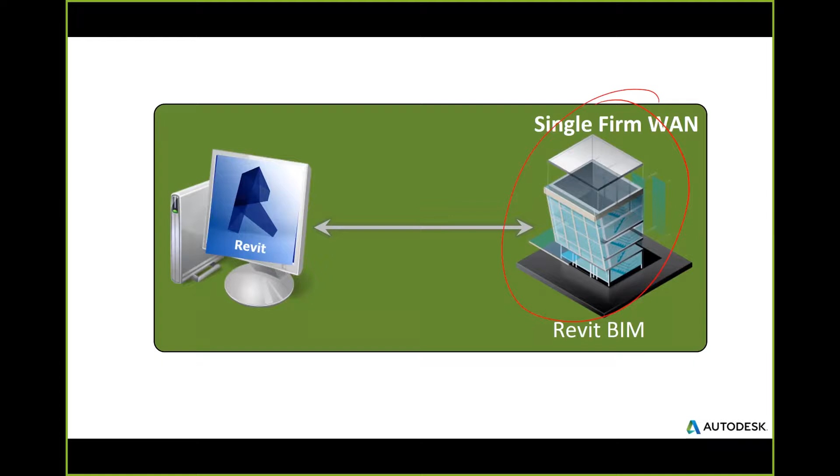Architects and engineers have known this for a long time, but the construction, medium-sized contractors, sub-trades, they're not familiar with this. They're familiar with AutoCAD being single-based; you can only open up and work on one file at a time. Well, with Revit, you can work on one file across multiple people at the same time.

So those firms that have been doing this for a while, the architects and engineers, for the most part, are the ones who buy Collaboration for Revit, or a general contractor who is part of a design-build group, and the general contractor is the head of that group. Collaboration for Revit would be for that entire team. And essentially, in a nutshell, it is the Revit central file living in the cloud.

It's as simple as that. All of your best practices on how you work with central files still take precedence. So let's dig into it.

So before Collaboration for Revit showed its head in this arena, we used to have firms saying, how can we use some technology to have a central file across multiple geographic locations and offices? So this is what used to be done in the past. Make no mistake, if you needed to do this yesterday before investing in Collaboration for Revit, you would be spending money and people time and hardware and a giant leap of faith for the project manager, because all of this had to be working simultaneously to have what I call multi-firm concurrent authoring.

The key point of this one here was the VPN connection. So you can put that by the wayside, and essentially with the investment in Collaboration for Revit, you've already got Revit, so you just basically tack on that service, and the service is per user who needs to run Collaboration for Revit. I'm all about keeping it simple, and I like using lay terms, and I try to stay out of the weeds with the geek terminology.

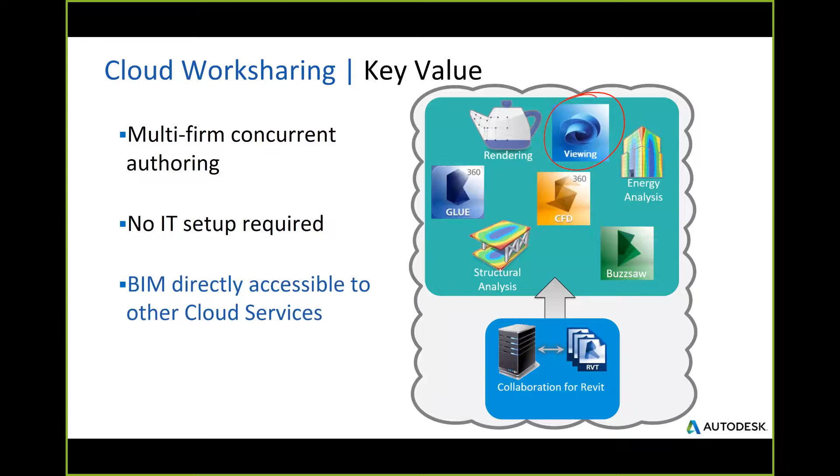And part of what we're going to preview is how do you leverage the cloud now? This is all about viewing, commenting, and marking up. And stay tuned, because I'm going to show my smartphone and show the team leveraged through my smartphone for commenting and marking up. Overall, we can do a lot from the phone and of course from your desktop as well.

So if I put my little geek hat on for a second here, there's me with my little triangular hat. You should know that we're not going to kill your bandwidth overall. Any delta changes, we add a door, we add a window, that delta change to the model is basically cached. And when you click on Save to Central, it's just that delta change that gets pushed up to the cloud. And then vice versa.

So let's say I've got Douglas, who's my structural engineer down here, and Douglas says, hey, Caesar, I changed the structural plan. I added this new wide flange column. Whenever I say Reload Latest, I basically receive Douglas's column update. So for you geek folks out there, we have a built-in software accelerator.

You should always know that you're working on the locally cached file. Those of you that have used central files before know that as a team, you're never working on the actual central file. You're always working on a local file. Same thing here. So in terms of what you do today with Revit Server, this is actually more transparent.

You don't know it, but it will locally cache the file for you and make you work on that file. So you don't have to take the exercise of downloading a copy of the central file, making it local and all that stuff. It's done for you.

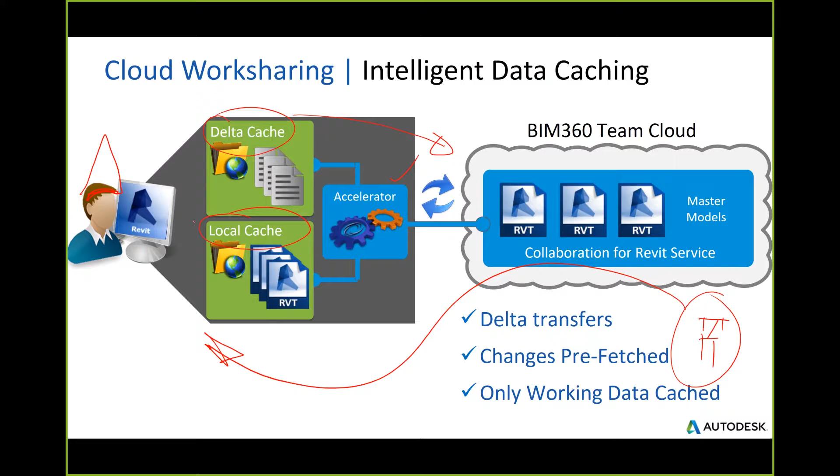And Communicator, one of the main values it holds is that it does chatting very, very well. So Communicator is a tool that pops out when you're running Revit. Those people that are currently signed into Revit and using it right now would show up as part of the communication on this team. The project that we're working on here is the small medical center. So I'm going to see when people sign in the morning in Revit, I'm going to see them show up there.

And then I can do either a direct chat with this person next to me by saying, hey, just reloaded the architectural and structural models. But we could actually do a team chat. So when more people show up and you want to send a general message to the entire team, this team chat can be used through Communicator as well. And nice little features from the tools down here to allow for screen capture.

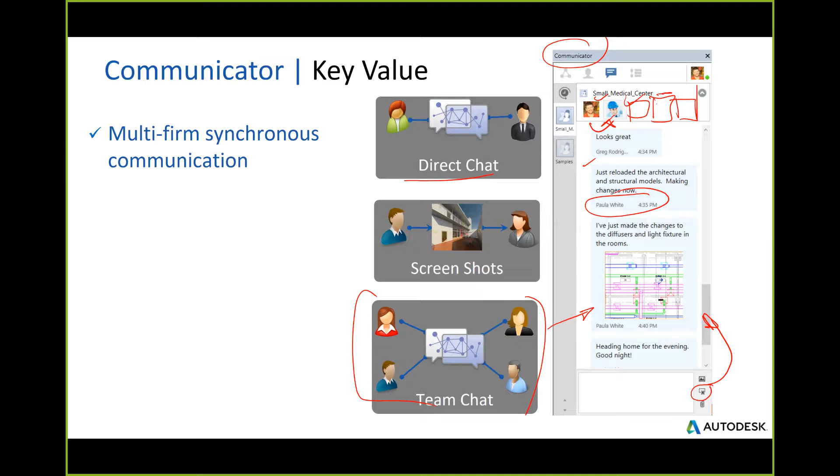Moral of the story, you would use this to try to cut back on email about incidental little things about the project. Are we using a butt jamb in here? Or are we using a miter jamb here? Really generalized questions that kind of bottleneck email. You can do this all through Communicator, and then everything is basically logged historically. And the last part about this is that you can export all of this communication. Safe to say that you're going to export this to a text file.

Now let me clean up my screen a little bit here because I just made a giant mess of it.

And whenever different people save to Central, and they're saving different Revit files, all of this will be communicated through this tool. So we get all kinds of great oversight on the latest and greatest, and then we ourselves can actually take advantage of this for our own well-being. All right, flip the page.

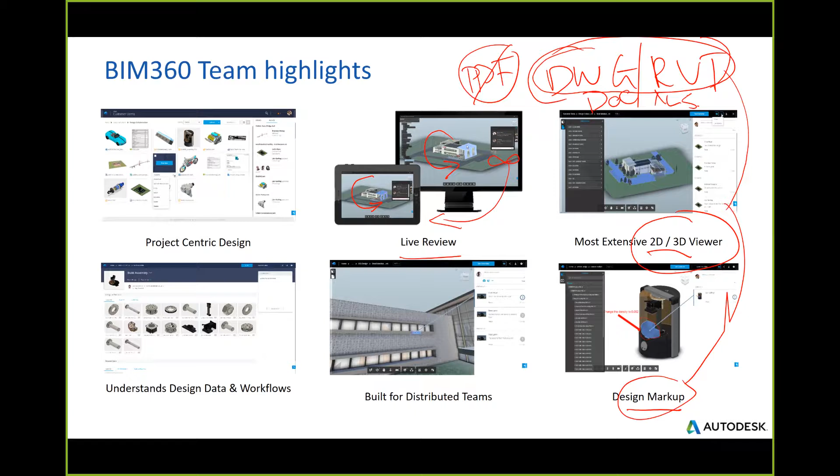So virtually any file format can be viewed through the native web browser or the app, and then on virtually any device. So yes, it's Android, iOS, and desktop. These mobile devices, whether they're Android or iOS, have the capabilities of going offline with your data files, which means you don't need an internet connection or a cell service to see them. The web version, of course, needs an internet connection, but the moral of the story is that the tool sets are practically the same in each instance and operate in the same manner.

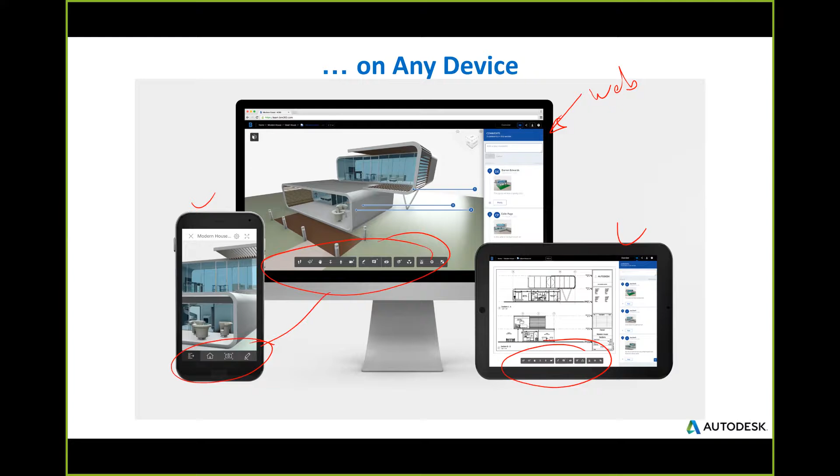So, collaboration for Revit, what's in the box? You get this central file work sharing in the cloud. When you buy collaboration for Revit, or we call it C4R as the acronym, included in C4R is BIM 360 Team. It's a per license basis. Communicator, that chat tool that's inside of Revit. The ability to do model management and versioning of the files, that's part of collaboration for Revit and BIM 360 Team.

The scalable licensing. So whether you buy a full license of C4R, or if you buy an individual license of Team, like I was saying for my project manager at $120, the scalable license means you can allocate the license to the person. The license follows the person on any device. If that person leaves the firm or moves on to another project, you can revoke that license and then administer it to somebody else. So it's a nice, flexible way of licensing. If you guys are familiar with Autodesk licensing from the past, it used to follow the machine, so it's different.

And essentially, the investment here is an $800 investment, but literally, if it just saves 10 minutes a week per person, it pays for itself over the duration of a year. We have a lot of large, medium-sized, and small projects on C4R overall. And the main parts of these projects are all about accessing the project data. That's why projects are being mandated, or architects that are leading projects are asking their subs to follow suit. You know, we want to access the project data. So that's collaboration for Revit.

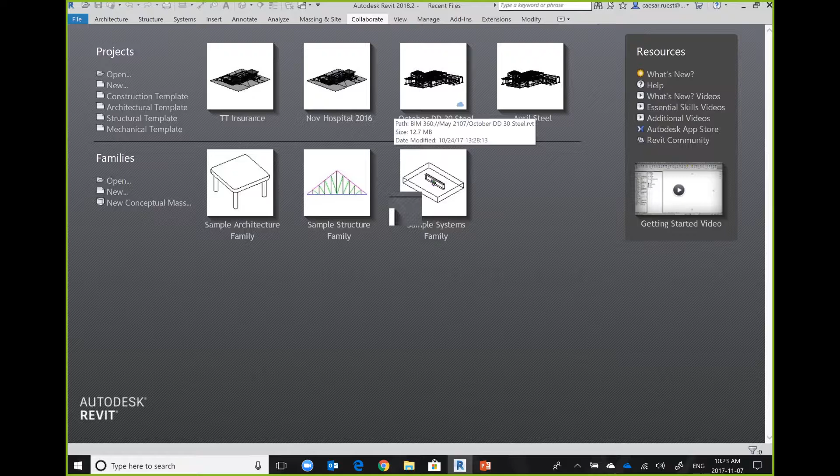It's as simple as that. So let's take a look now at what all of this fuss is about. Right in Revit, Revit 2018 does come with the Collaborate for Revit guts in it. The service is not activated. But when you see Revit, I'll just zoom into it here for us, the Collaborate tab will become your best friend. Now, right now, the Collaborate tab is showing me this ability to manage models.

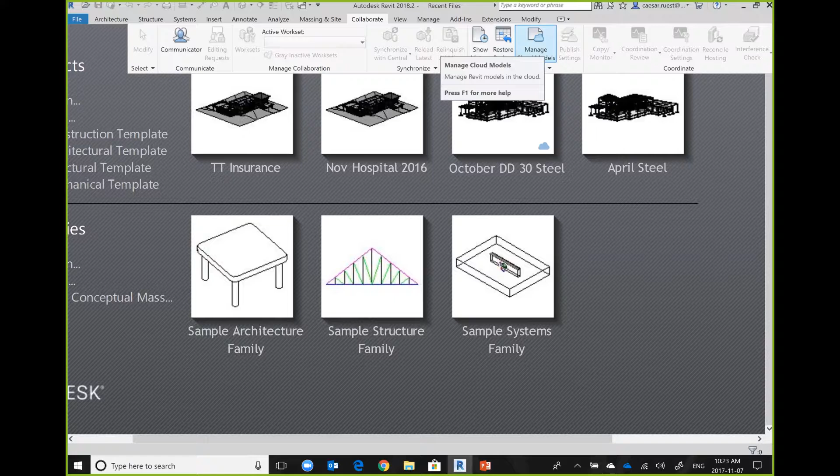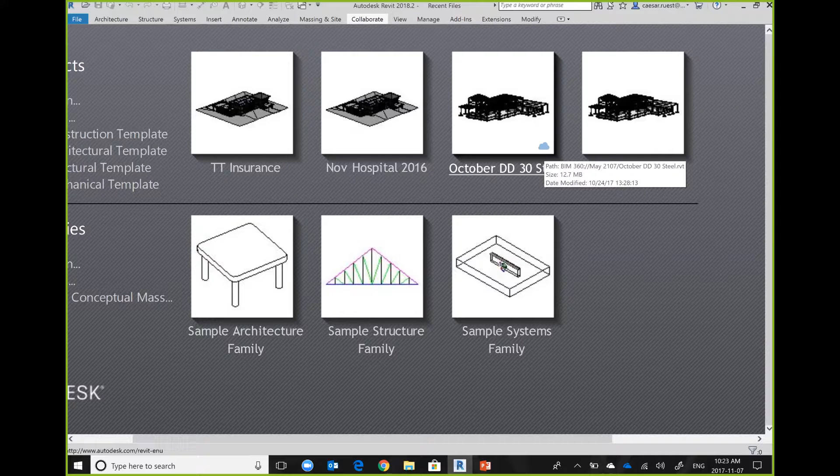This is without even a single model open right now, but you can see this model with this moniker has a path of BIM 360. The project name is May 2107. And in this case here, this is living in the cloud. This is not. And the same thing over here, when you say open, you're going to see BIM 360 up here now. And this is your gateway to the cloud, BIM 360 Team, where your files will live.

Essentially, let's open up this. Let's start from scratch. This file called TT Insurance is local to my server or local to my hard drive. I want to show you how easy it is to kick that thing up to the cloud. This is about a 25 megabyte file. It's got 3D views on the go. It's got sheets already on the go. Collaborate in the cloud.

Now, there was very, very little pre-work set up here. The only thing that was set up that I recommend before you click on the Collaborate in Cloud button is that you have to set up the project on BIM 360 Team first. So once you set up the project, you'll have that project name listed here. So for example, let's plug it into this 2107.

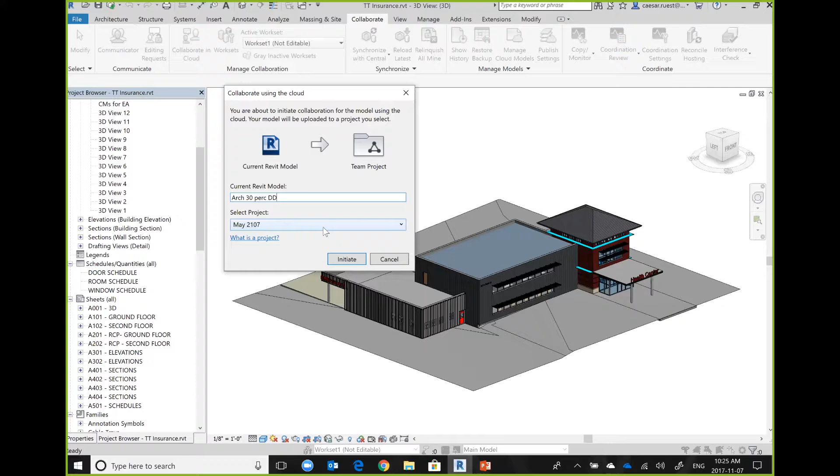And we can say, let's rename this file. Now that it's moving off my local desktop, we can say that this is my Arch, let's say 30% DD, right? So we're giving it a practical name, and then we say initiate. Now, if it's not a central file, it'll turn it into a central file. If it is a central file, it'll just push it up to the cloud automatically without changing the worksets. But it's doing these steps first.

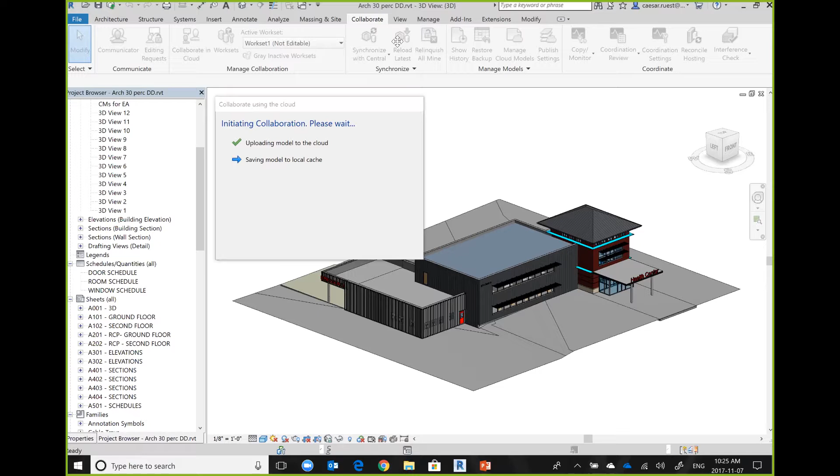This is pushing the full 25 megabytes up to the cloud. And then once it's up in the cloud, let me just see if I can move this, you're going to see my name at the top there where it says Arch 30% DD now. It says, okay, I just pushed it up to the cloud. I'm going to pull back a locally cached file to you, Caesar, and then you can start working on it. So right now, that file name at the top where it says Arch 30%, I am truly working on my locally cached file, and I can just close this off.

So here we are in the cloud. It does a default publish at first so that some project managers can start to see some of the default sheets and 3D views in the cloud. But as architects and engineers, the traditional workflow, when they work together, they like to work on something for a week and not have architectural changes sporadically happen throughout the day, throughout the week. As engineers, we would say, give us a set to work on. We'll work on it, and then we'll come back towards the end of the week if we wanted to.

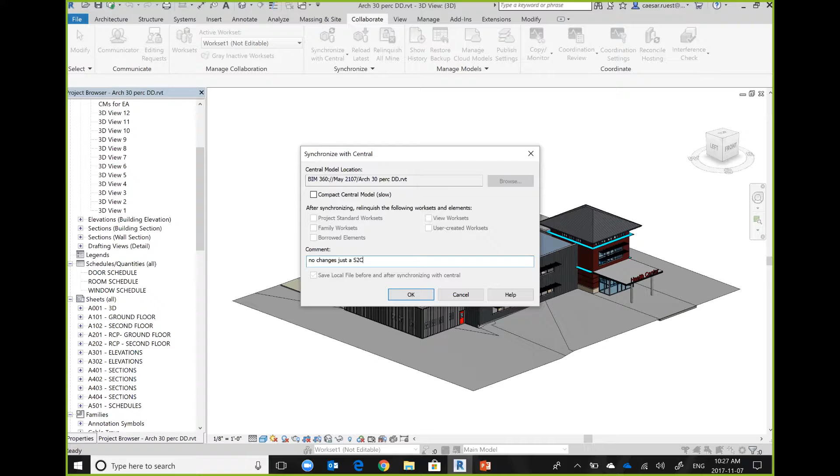So you have that choice of being dynamic, of working day to day, or hour to hour, and saving to central. That's fine. You just click on save locally if you're going to go get a coffee. You click on save to central if you're going to literally go for lunch or something like that. And you would put in some notes here to say, like, no changes, just a save to central. So if there were changes, those delta changes will be saved. But there's nothing much that's saved other than it's publishing out these sheets.

And so that's a little bit of a segue. In the theme of Star Wars, we have the power, or whatever the case is, if we want to lock down what our wonderful project managers need to see, because as the Revit users, we might have a bunch of sheets on the go and a bunch of 3D views and sections on the go, but none of them are fully complete. When you only want to give people access to see parts of the model and sheets, you go to a publish setting.

And this feature has been in Revit for a long time. You create a new publish set. And then from this publish set, you go ahead and choose the actual sheets that you wish to have sent to BIM 360 Team site.

So in this case now, if I save and close this set, I will only send to BIM 360 Team, which means my project manager won't get to see all of these sheets here in Revit. They will only get to see these sheets and this one 3D view. So it's your call how you want to publish.

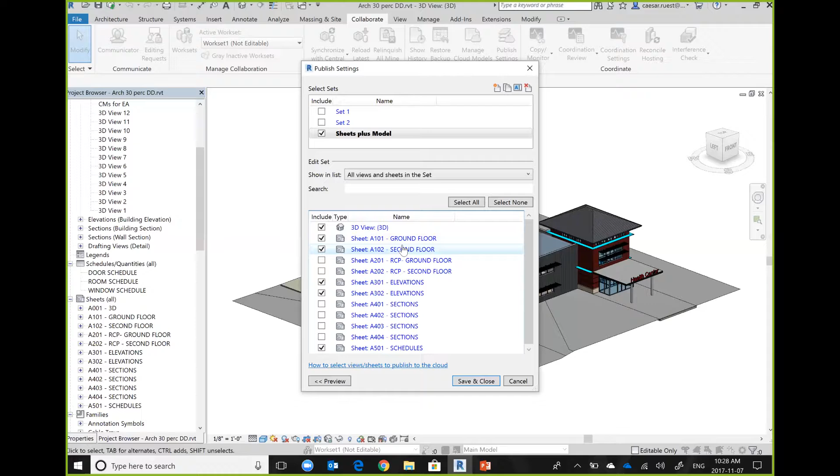So once you save and close it, the rule is you don't just save to central now. You use this next button, which is your Manage Cloud Models. And this is where the power of Superman or the power of God kind of comes in, where you say, in May 2107, I want to publish this file right here. You can see Arch 30% DD, and I'll zoom into it here.

You can see this one here has got this symbol, meaning, hey, you haven't published latest. You changed the publishing sets. If you want that latest published set to go to the cloud, you need to click this button. But this one says the latest published set here is already in the cloud.

So we would click this, and it would give us this educational information page, and you say, yep, got it. And now it's going to go ahead and publish this. And it says you can close this window during publishing. We'll get back to you.

While I'm in this dialog box, I want to show you something from an administrative standpoint. If your setting is Revit, it will still save 10 versions of the model every time you click on save and save to central. You can view those versions here. You would also delete the master central files here.

I had one customer say, hey, Caesar, I keep deleting the file that's in Team, and the bloody thing keeps showing up after we click on save to central, or after we click on publish. Like, what's going on? Well, the mystery behind it all is we actually have a central repository in the cloud for C4R, and then we have a mirrored image for publishing.

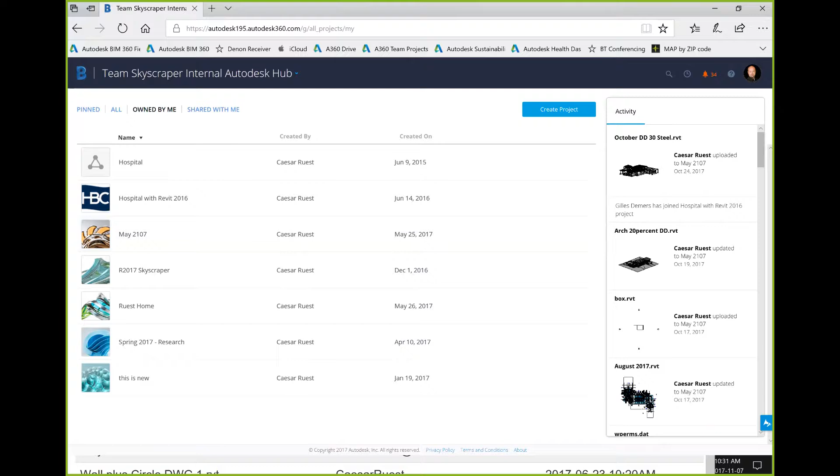Let me show you Team. So here we are in our hub, and this is part 3 of the discussion. This is where the published files land. My hub, this would be your company name up here. These would be the projects that you're hosting in your company. We have this one project called Hospital 2016.

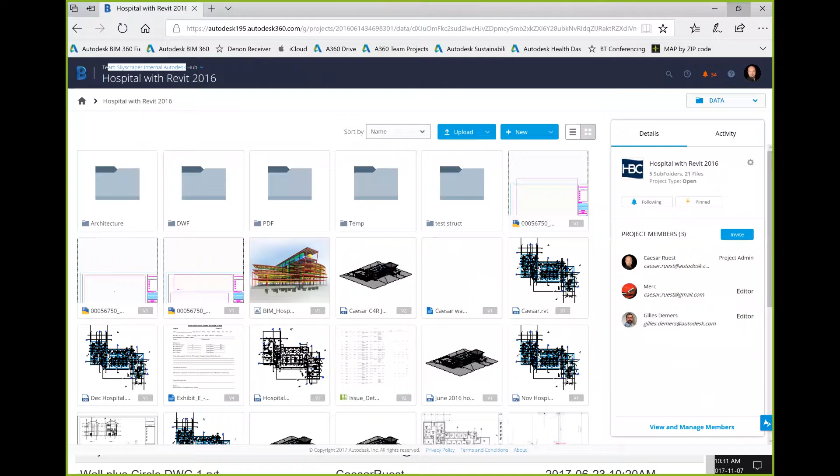And what you see is what you're going to get. So in this case here, this is a good chance for me to see if I can bring my cell phone back to light. Let me just coordinate this a little bit better. Okay, let me take this off here, and for some reason this is not cooperating so good, so bear with me.

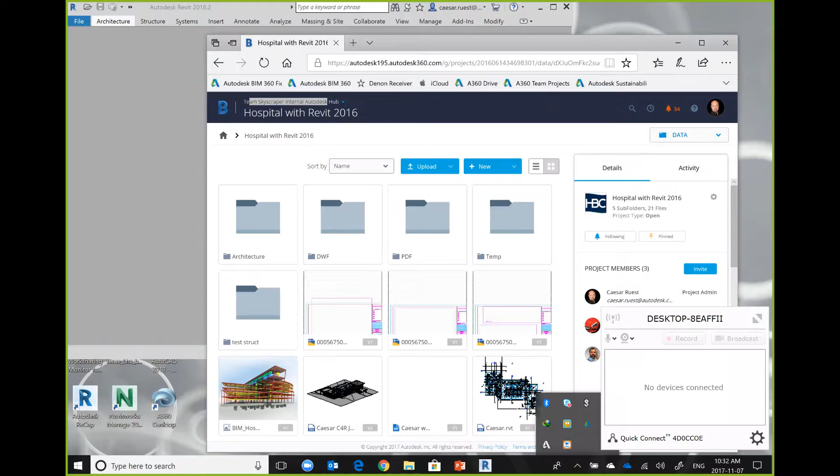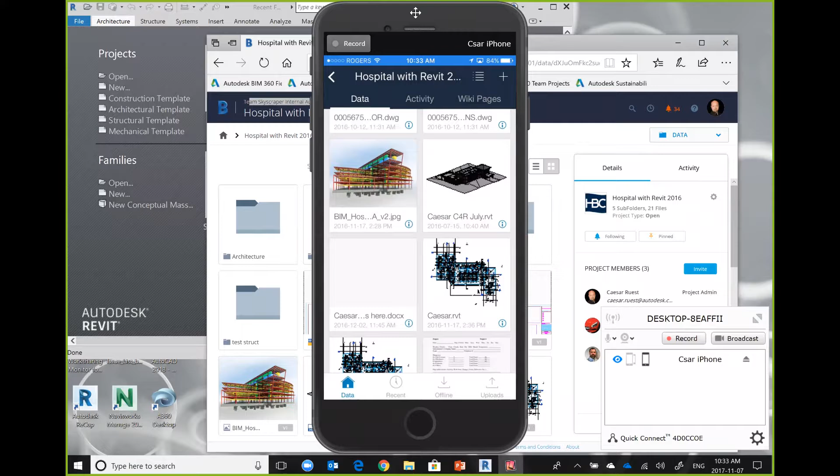So I've got my 2018, let me bring that back up because there's something else I wanted to show you in there. I've got my Team site, and I wanted to bring up my phone. So let me make sure that my Reflector is running. Okay, that's running. So let me see if I can connect my phone to it here now. There we go. Okay, so let's put these two puppies side by side.

So here we have it. So when you're using the web flavor, we're inside the project 2016. This is what you're seeing. So when I scroll this, you can see this is a JPEG. These are DWGs up here. You can see the icons for them. Down here, these are Revit files. This is what's been published to this site.

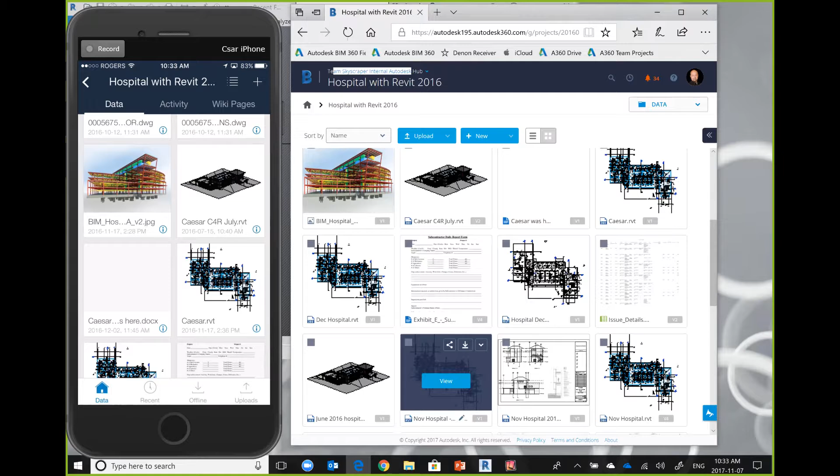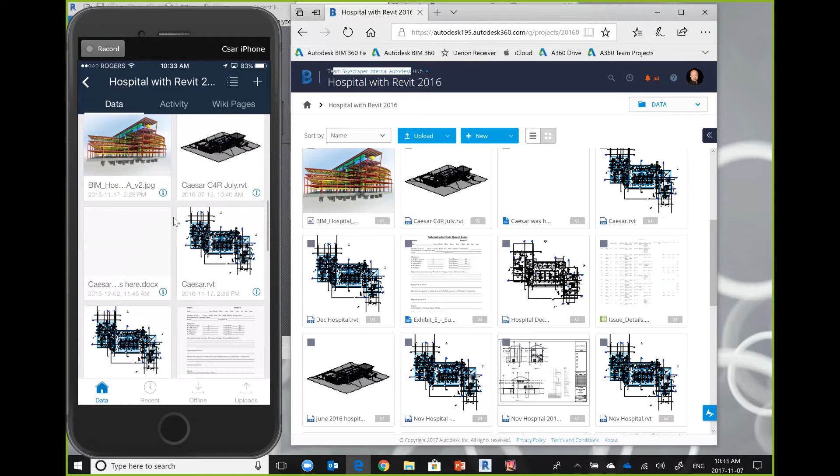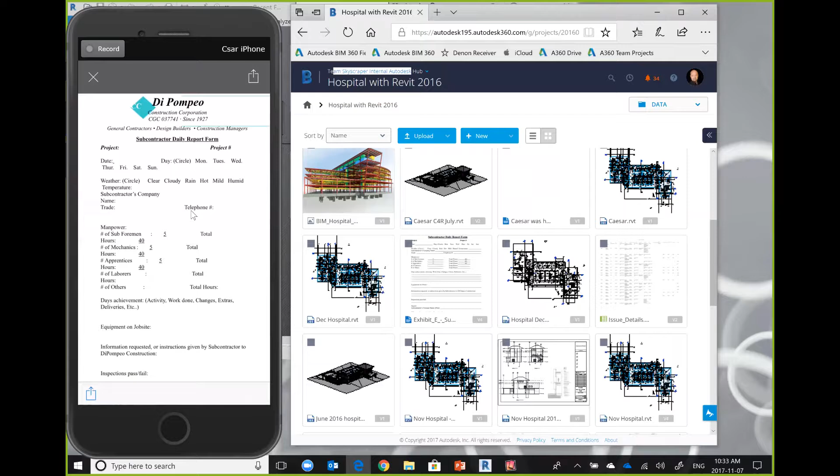You also see here, this and this are Microsoft document files. That's an Excel file. So native viewing of all these file types right within Team, and just like my phone over here. So you see, I scroll down, there's my Microsoft Word file. You just click on it with your finger, and you would look at it. You can read it. You can open it up on a separate app on your phone.

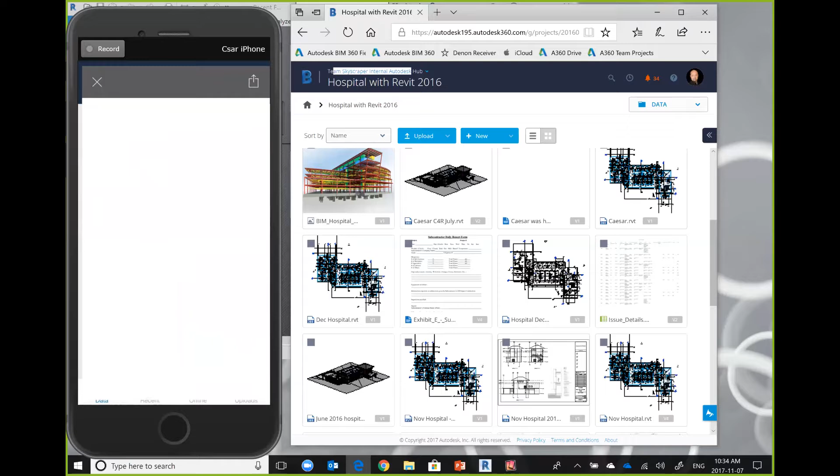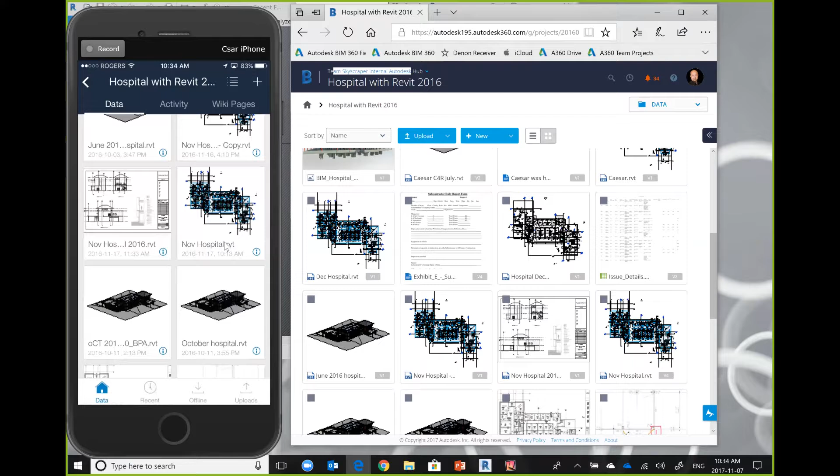The same thing with the Excel file, issue details. You would click on it, but at least the native viewer's here. So if you just want to view it, you've got the native viewer, and that's half the battle sometimes. There is one file that I want to show you from Revit. So right within here, this one here, this Nov Hospital.rvt. So for example, this is the one I want to show you here on my iPhone. These are the exact same files. So the iPhone's cooler, so let's open it up there.

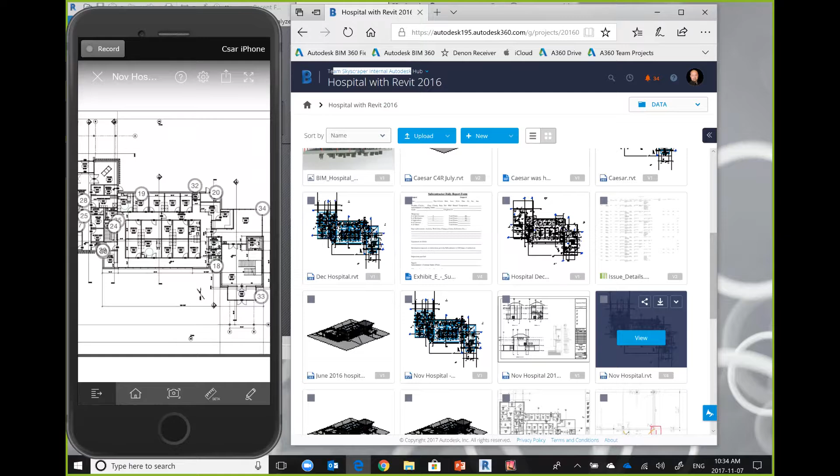So while we have this one opening up here, you're going to see issues and comments and all of these, these are your little push pins of zooming in, and you can still see what comments are where with these comment numbers. And then you also have an inventory list down here to go to. So this inventory list says, hey, Caesar, you've got 4 sheets to examine. So right now you can see that I'm on sheet A101.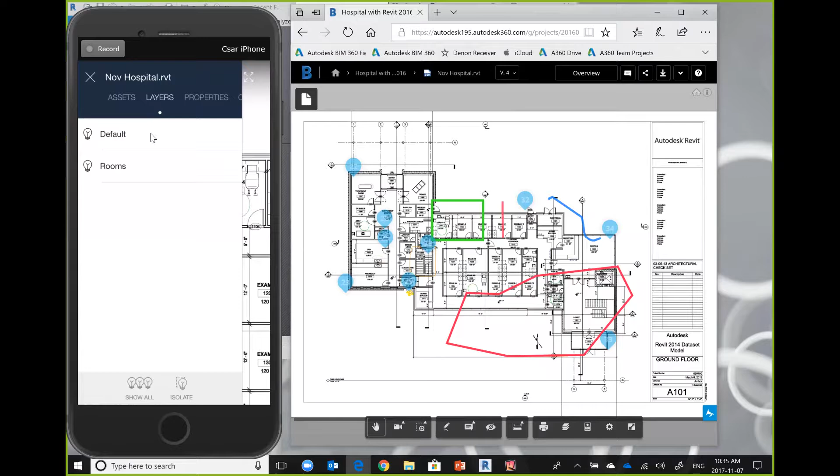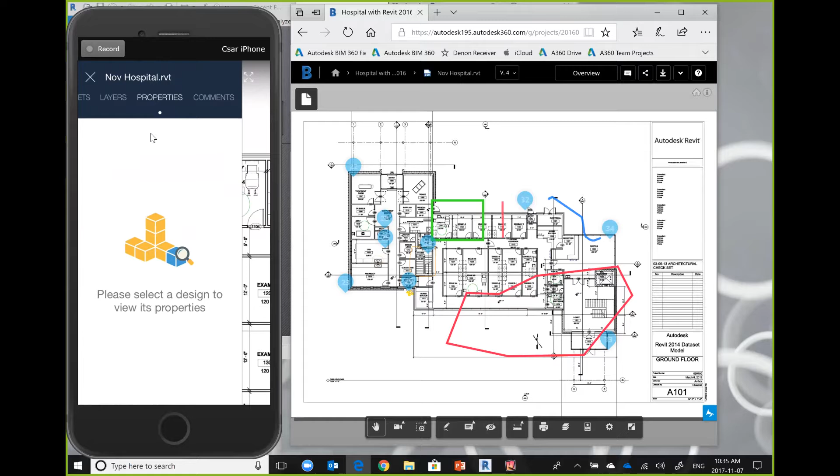If it was an AutoCAD DWG, you would have layers, but because it's Revit, you actually have properties. So when you choose an object with your phone, with your finger, it's a Revit object, so it'll show you the properties of that object. And then the last one, this is where all of the rubber really hits the road, the comments and the versioning. So for example, over here, all of these bubbles were the same bubbles.

To get to this comments and versioning, this is where you look at the overview of your entire documentation. So see all these comments? This is on version 4 of this hospital.rvt. So we had comments and redline markups. You can see my comment trail here. I said, what are your thoughts? And he goes, let me post the latest shop drawings. And of course, I had my friend Gilles say, I'm the owner, chiming into it.

So push pins or redline markups all show up as comments, and you can do both through your phone, your iPad, or through your desktop. And when you're doing it, let me just close this off. Zooming in, you would touch on one of these circles and jump to a specific comment. That one there said, please address the steel landing. Okay, got it. Moving up here, there's comment number 19. You would choose on it, and it would open up that comment.

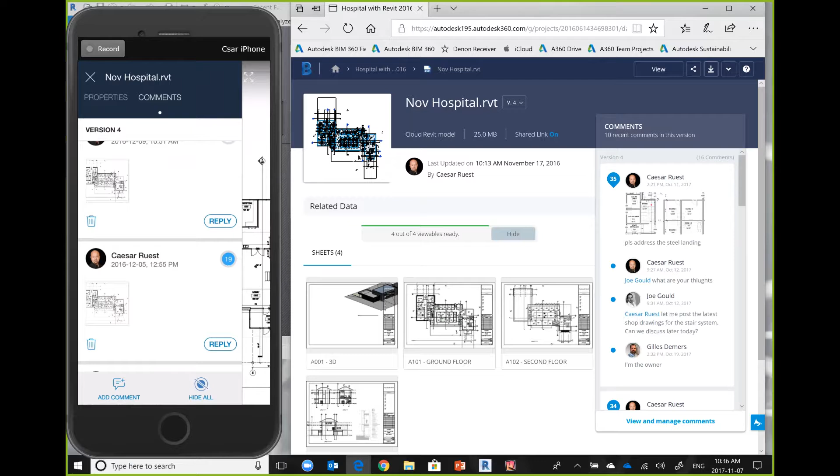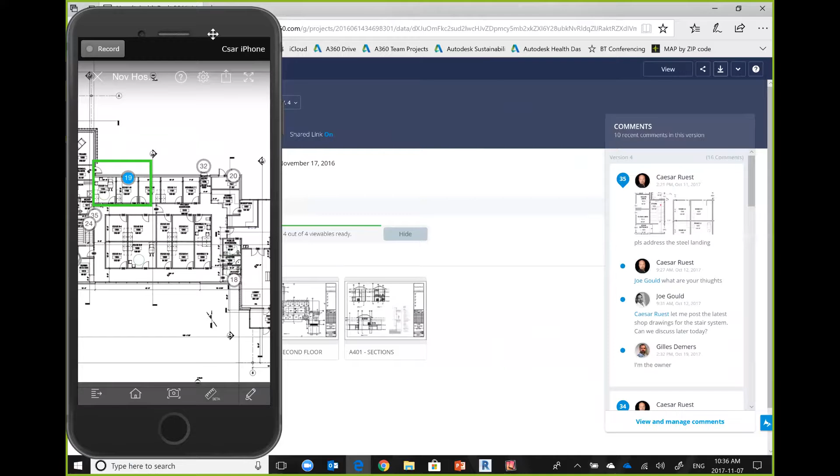Let's just say 19. Oh, okay, there's nothing much to it. It was just a simple example I gave in another past demo, but you would reply to it, or you'd say, trash it. So great design tools, all at your fingertips here. And there's one thing that I really want to show you about a workflow. So we are on version 4. We had 3 past versions. You know what the workflow is like if you're in the design side of things. You make a design, somebody marks it up, you change it, you upload it again, you need to create a version of it, and then check it again, right?

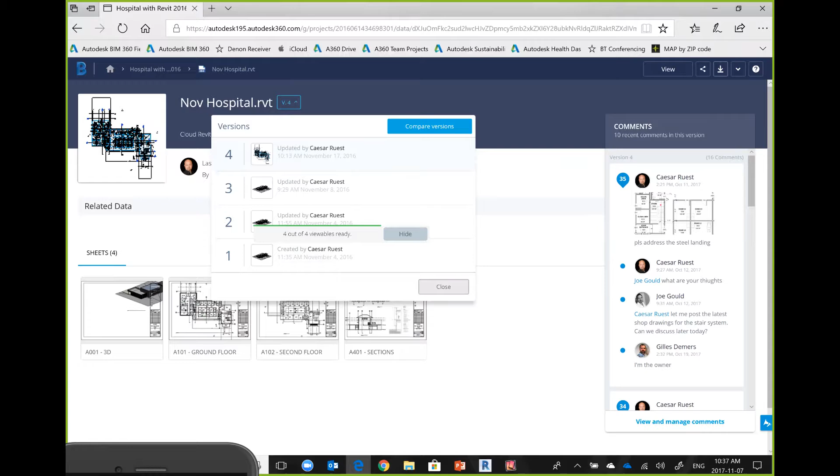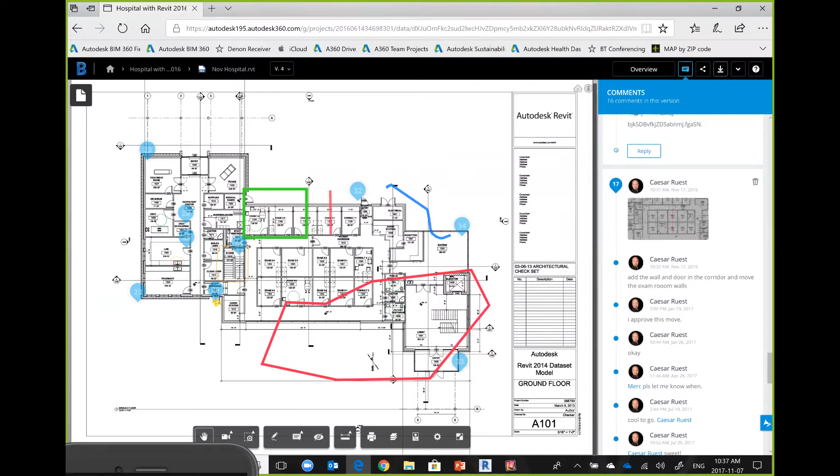So in this case here, let's scroll down. And versioning actually helps to track these comments. We are on version 4, and there were 16 comments in version 4. So when I scroll down, you're going to see this one right here. So we are in version 3 now, version 3 of the Revit file, right? Stay with me. And in this case here, this exercise that I went through, comment number 17, this is a true to case design exercise. So we're clicking on this comment. It shows me the entire thread.

And this is where I kind of laugh at my job because I play alone in the sandbox a lot. So I become not only the project lead, but the project manager, as well as the Revit guy and the summer student, all combined into one sandbox, right?

So this is the markup that I did. Add the wall and door in the corridor and move the exam room walls. The project manager says, yeah, do it. I approve the move. The Revit guy says, okay, hands it off to Merc, who's a summer student, saying, please let me know that this is done.

And then Merc responds back saying, this is cool to go. This is in blue because whenever you do commenting, you can do the @ sign, and then you start typing in the person's name, and it shows up here. And then that person, like Gilles, that's my buddy in Montreal, he is going to get an email, and it's going to say, Gilles, you have a comment on this design, and it has a single link to bring him back to this page.

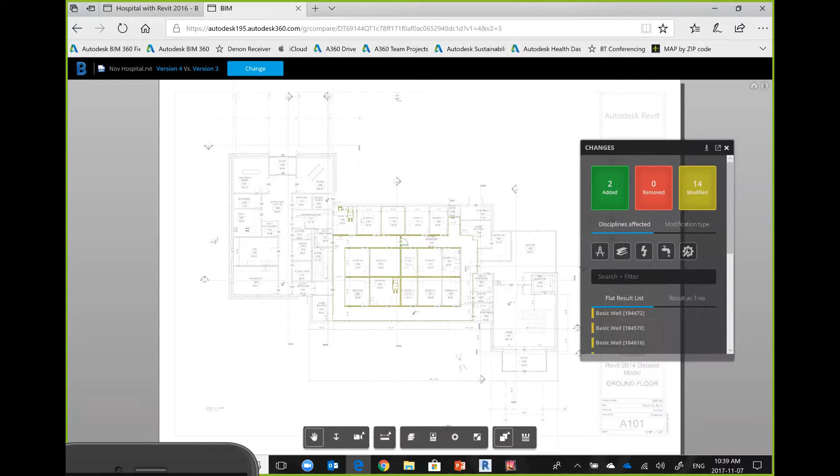Now that all of this is done, this is where the comparison takes place. And even though I've shown this hundreds of times, I always say, from my perspective as a past design firm guy, this really holds a lot of water. These are buttons highlighting elements in the Revit model which were either added, removed, or modified, right? So modification means changing the property, adding data, moving it or transforming it by inches left or right.

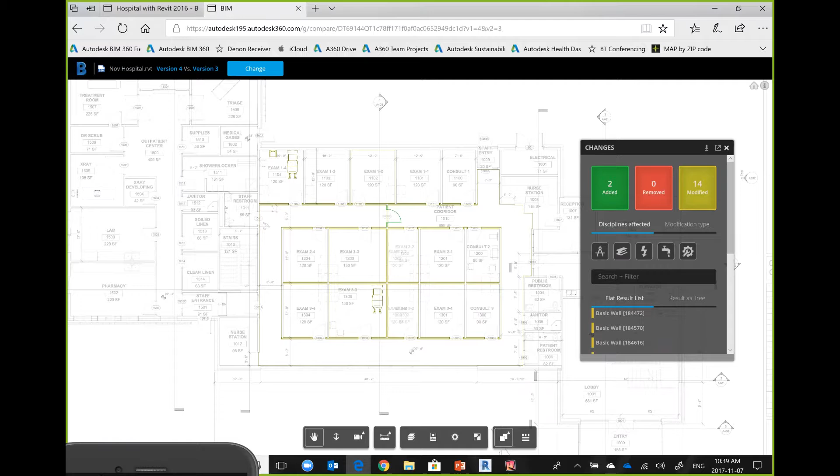So when you turn that off, you only see now the 2 things which were added, and there they are right there, visually, as well as based on data. And the nice thing around it is the selecting tool, where you can select and it tells you this element has been added in version 4. And you can do this cross-examination also by discipline: architecture, structure, electric, plumbing, mechanical systems.

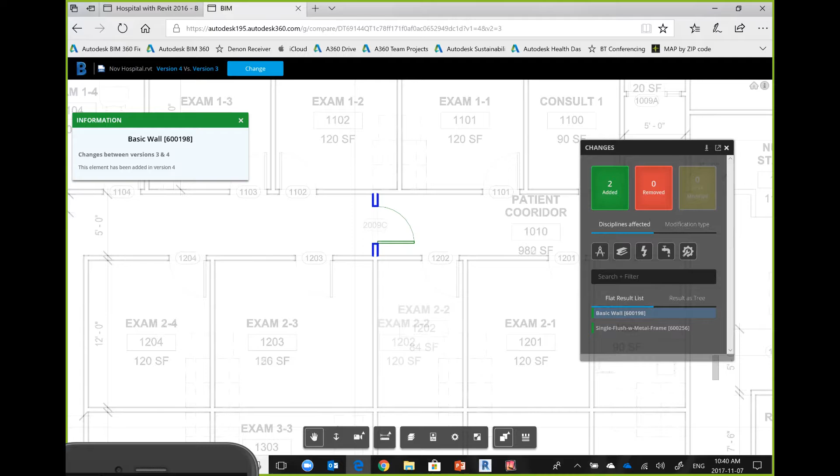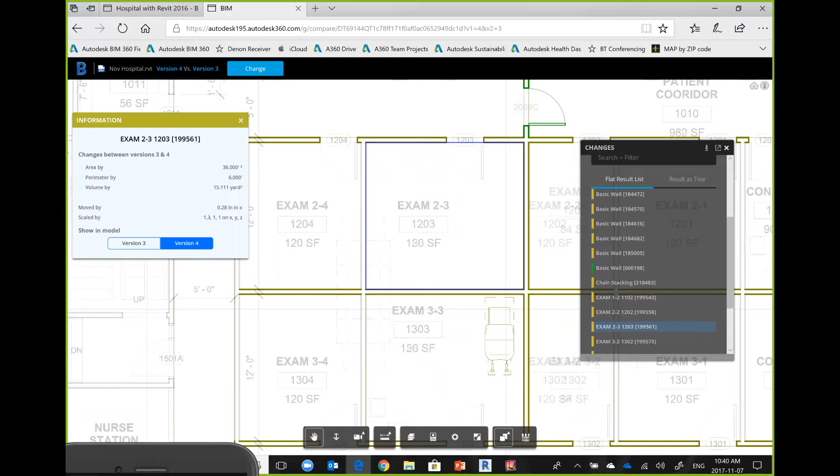So this is the last piece which really drove it home for me. Programmatically, if you are responsible for the client's program and you're trying to find spatial allocation, this version 4 in blue, right? How big was it in version 3? It was this big. That is huge. So these transformations of Revit models from one version to another are highlighted as well as calculated because they are Revit models. That's why the Revit format is so key and a huge differentiator for Autodesk.

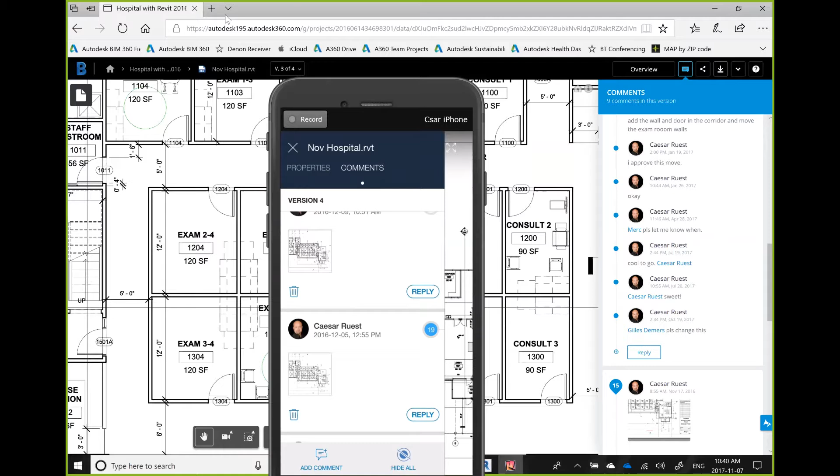Now, there are more things that we can do, of course, within our apps, as well as within our desktop side of things. Let's go back here. So, you see the details and activities. You can see things in list view as well. Instead of thumbnail view, you can see sorted in list. It tracks everything by user identification, who did what, when, last updated, the activity trail, as well as up here, we also have things like a calendar, a discussion page, a wiki page, and all of that is right here at your fingertips on your phone as well.

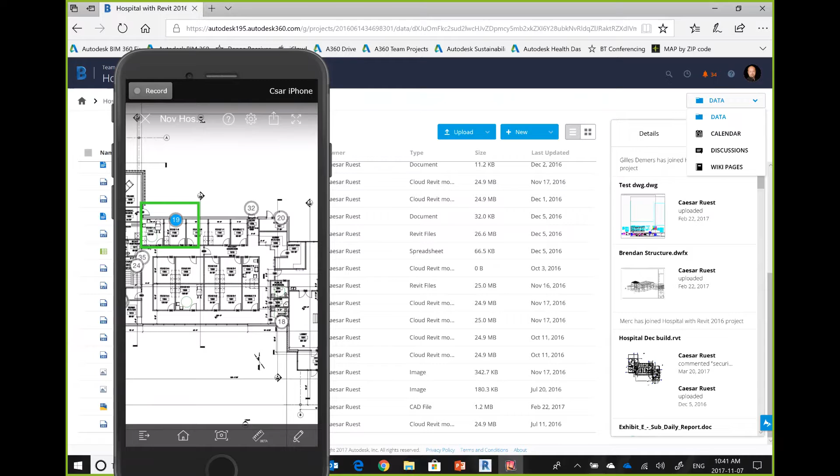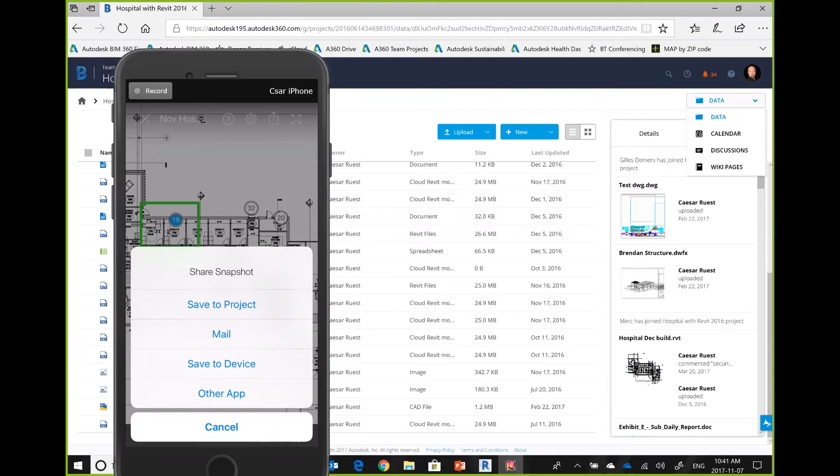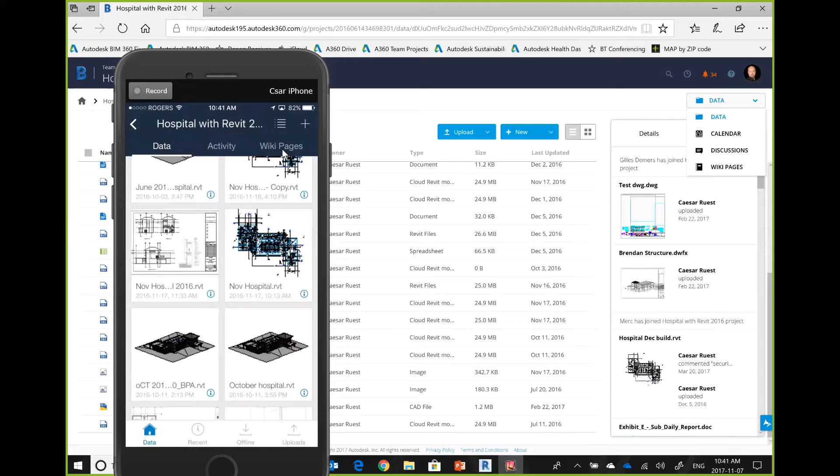So you've got these different buttons like measuring, marking up. You can take a picture, actually, which is really cool too. You can take a picture right from your phone and add it to the digital paper trail, or mail it. It's up to you. This is my home view, and then we can go backwards a little bit, and this is where we have these data, activity, and wiki pages right here. So the activity, here's the activity thread on my website, and here's the activity thing on my phone side. And then wiki pages at the top.

You can use the wiki for a number of different things. I've made recommendations to put a wiki that contains file locations across many servers. For new people that come onto the job, just point them to the wiki to say, if you want to learn about where everything's stored in this project, go to the wiki and you'll find that out. If you want to track meeting minutes, you can also do meeting minutes in here too, and format the meeting minutes specifically. This is a very small example, but I've got a deeper example on another website as well. You can format it, different text heights, and so on. So overall, a lot of power on your phone.

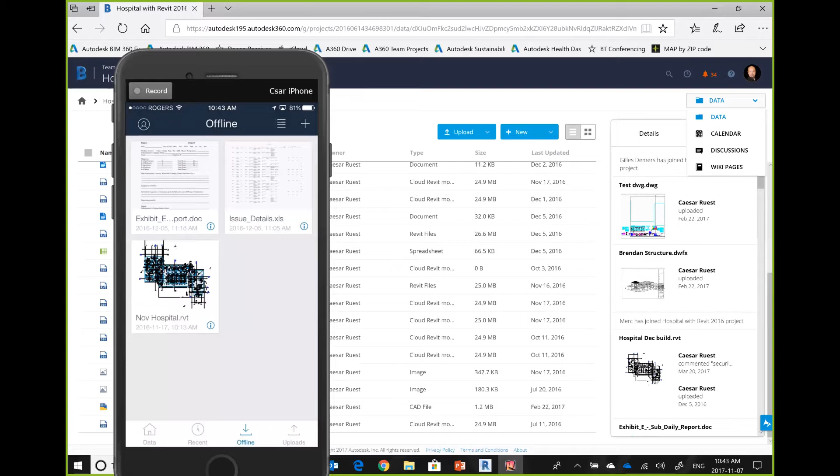You also have your recent button down here, which shows you the last 3 files that you were checking out. And in this case here, the offline capability, this is where you would grab files before you lose your connection to the web. You would click on the offline button and choose files to take offline with you. So for example, I want to take this one and go offline with it. And you can view the 3D models here too. I wasn't showing you the 3D models, but maybe I should. Let's go back here. Let's go to the data. There's a 3D model right there. Let's go ahead and choose it.

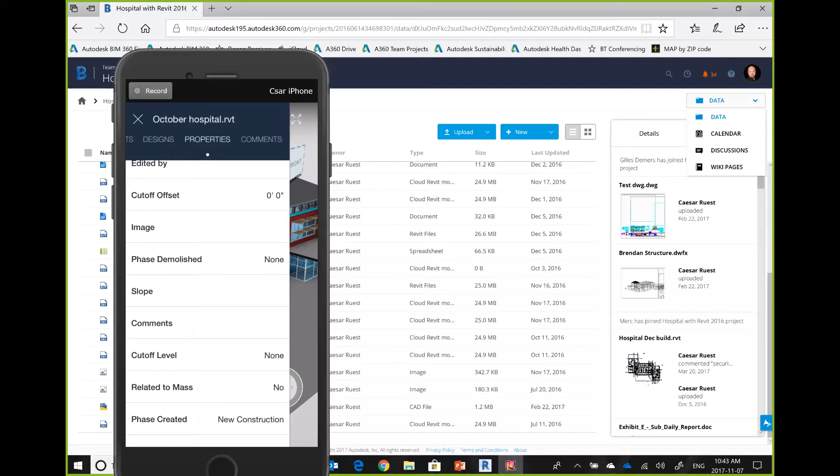Quite dynamic. So I'm zooming in. You can still do the selection of things. So for example, I choose this roof, and then from that roof, you can actually go ahead and grab the properties of it. So in this case here, what are the properties? Oh, okay, it's a 12-inch generic roof. It's a design detail. It's not a detailed design yet. It's just in design development.

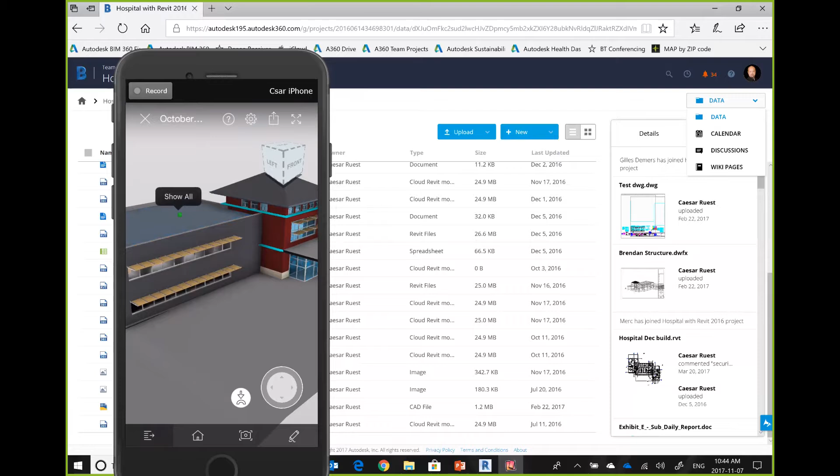And then you could also hide that roof if you wanted to as well. Hide it, and then zoom in, rotate around, and just keep hiding things as you go along so that you can start to dig into the model, right?

So that was a lot. Sorry, I'll turn off the fire hose now so that you're not consuming all of that water.

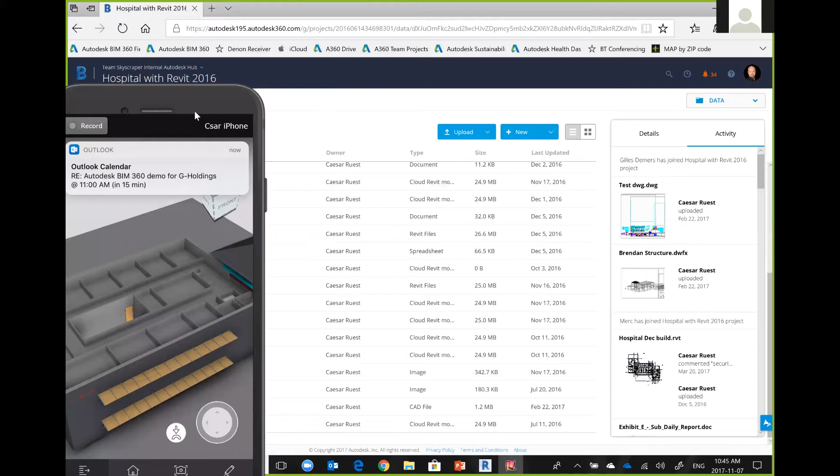Do you want to start off, Douglas? One question is, what is the storage limit for BIM 360 Team? Yeah, good question. So there is a starting limit. So Team is really the mechanism of storage capacity. So when you buy C4R, like I said, it comes with Team, and that's where your beginning storage capacity starts. That's 500 gigabytes to start.

What happens when you buy multiple licenses of Team or C4R, and they are housed with one consultant, one architect, for example, the data storage can be pooled together. So effectively, if you have 4 Team licenses or 4 C4R licenses, you can have 2 terabytes of storage. So that's the first thing.

As a follow-up answer for that, when we do versioning for you, you saw how I had 4 versions of that Revit file. That Revit file was 20 megabytes. You don't lose 80 megabytes. So it's not 4 times 20 because we have 4 versions. You have 1 version of 20 megabytes. That's your current version. That's what basically gets used as consumption. But realistically, if you can use 500 gigabytes to start, I would be impressed.

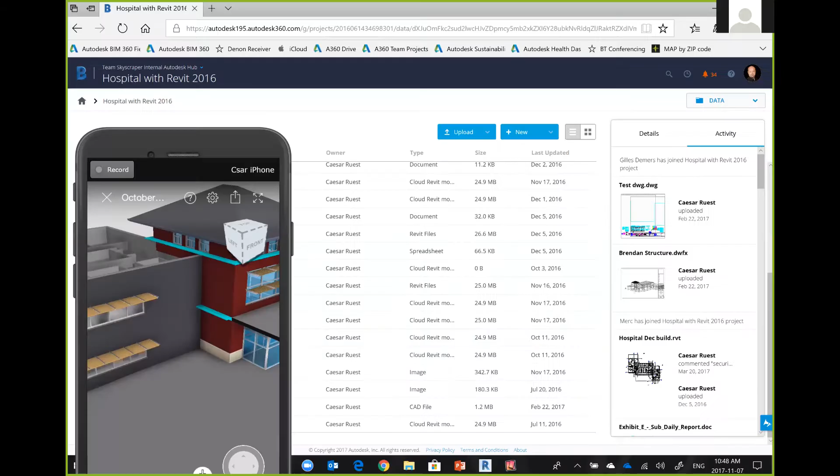So, if you wanted to start at the lowest entry point, which is just buying BIM 360 Team, you would simply use the upload feature and you would upload any of these files to Team. And that basically sets the ground rules of you're only going to use Team for viewing, commenting, and marking up. You have no intention of really transacting through a central file.

If you are the architect and I am the engineer, if you're using this lowest entry point, you would upload your architectural file, and then I would have to come up here and download your architectural file so that I can insert it into my Revit environment. And then when I'm done with my engineering file, I would upload my engineering file, and then you would download my engineering file.

So we are using a nice cloud way of sending files back and forth, but it's almost like a glorified Dropbox. We are wasting time by doing the upload and download. That's the first thing. The second thing is we are no closer to real time than we were when we bought this. We do get some great new tools in marking up and commenting. So you have to set that realization that we're going to use time to upload and download, and we have to use our managed links and stuff like that inside of Revit.

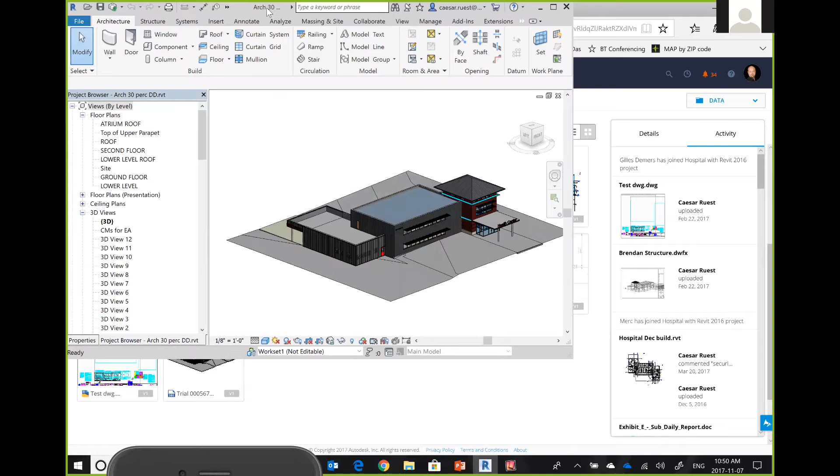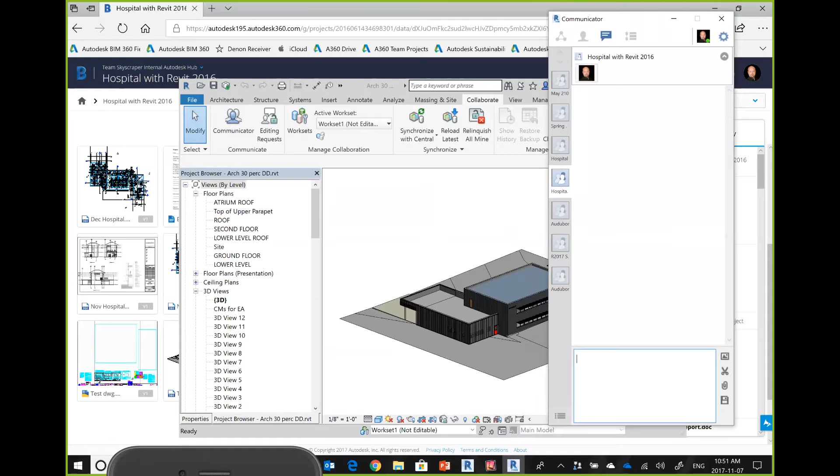Under Collaborate, we have this Communicator tool, and this is what I was going to show you here. So in this project of 2016, we can take a look at this project, or we can go into all of the projects that we're working on. So this is Collaboration for Revit because Collaboration for Revit includes Communicator, and because it includes Communicator, you can then go into any of these projects, so the Audubon project, and you can see the paper trail here as far as comments and screen captures.

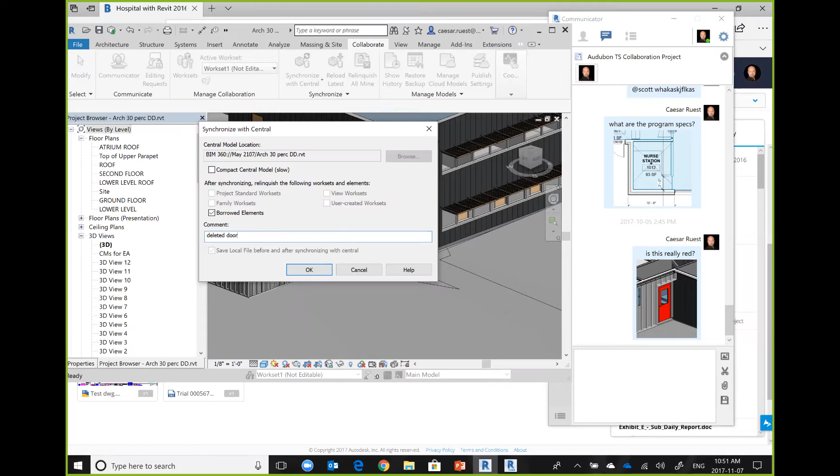And we would work inside of this Revit environment. You know, we don't want this door anymore. Okay, we could delete this door. And once we delete that door, we're going to click on Save to Central. And you would put that comment, deleted door. Just by doing this and saving to Central, you're going to see now it's telling everybody, hey, Caesar's deleting the door, that wing nut. You can't get out of this in case of a fire now. But Douglas, who's the structural engineer, can say, yeah, excellent. Now I can put my cross bracing right in that section of wall.

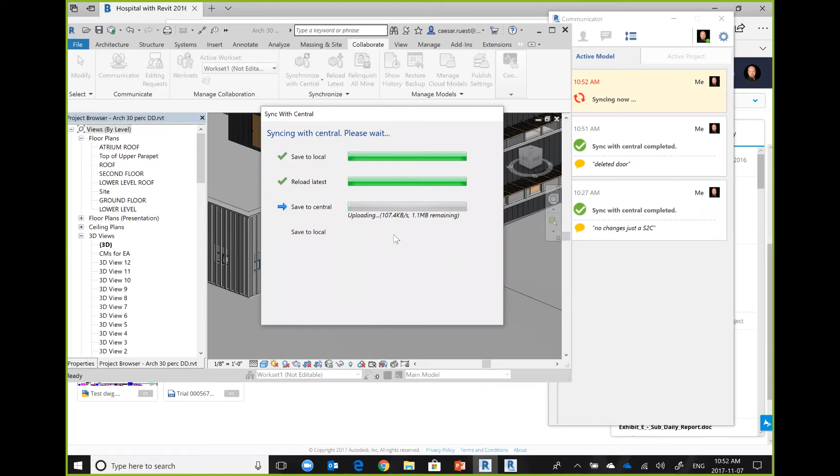So Douglas would actually say, reload latest. And he would actually see this change almost instantly. There were no new changes, of course, but you would see those windows come through again. He would see this reloading latest, and that's it. So that's a huge benefit right there. When I put the equation, if it saves you 10 minutes a week per person of using C4R, it pays for itself in a year. Hopefully that clarifies things.

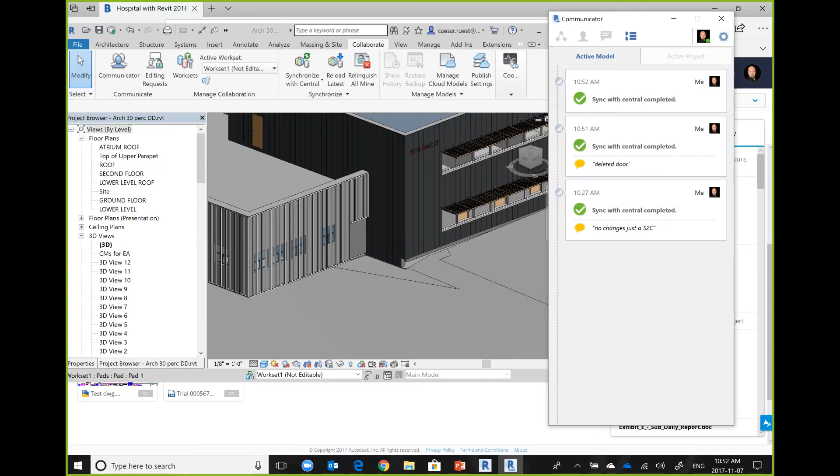That was awesome, Caesar. I do have another question for you. How would you recommend a workflow for your IT person? So you definitely have your IT that wants to back up the file, the model, to the server. What would be your recommended workflow for that?

Awesome question. If I knew who was asking it, and if I was with you right now, I'd give you $1 or buy you a coffee, or if it was after 5, buy you a beer.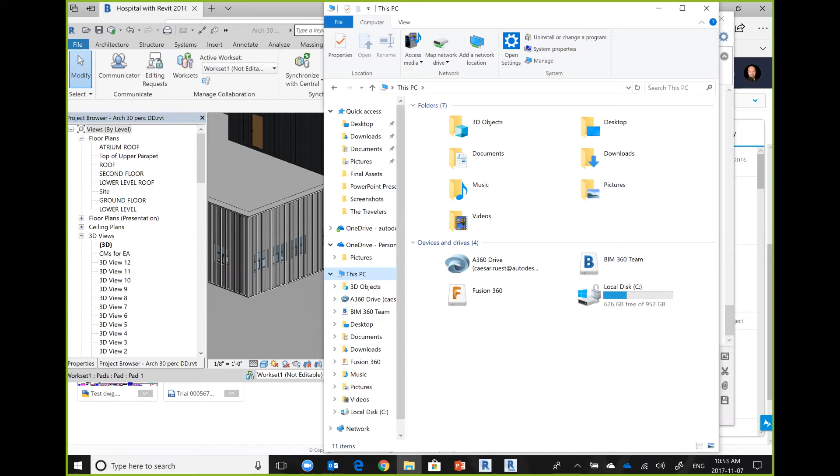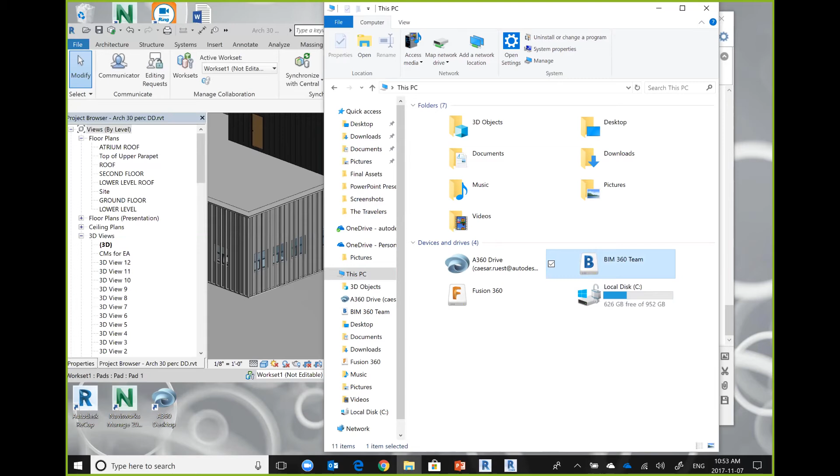There's two things. Number one, you can push files and pull files as far as moving data back and forth using the team site, like the upload or download capabilities. But this is the one thing that I was highlighting as far as a beta program. BIM 360 or Autodesk Drive is what I said is in beta, and it shows up as a virtual drive right beside your C drive. And so this is my virtual drive. So when I click on it, it will expose all of the hubs that I have access to, and inside of those hubs, all of the projects which I have access to. So Skyscraper, this was my hub.

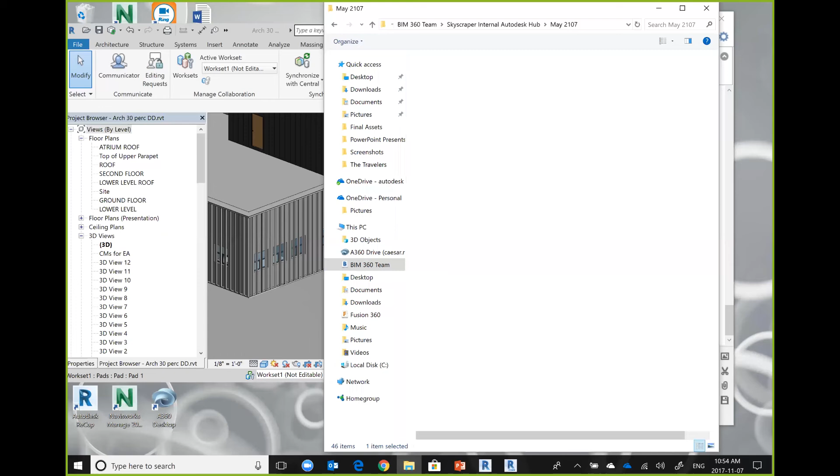So just like a virtual drive, here's all the folders, and May 2107, that's the folder we're working in. Here's all the files, and you can grab this and drag it right into your server for backing up if you wanted to. Or vice versa. From your server, you can push files up to Team just like that through here. Now, I don't know what the future holds for Autodesk Drive. It should be coming out in the next little while.

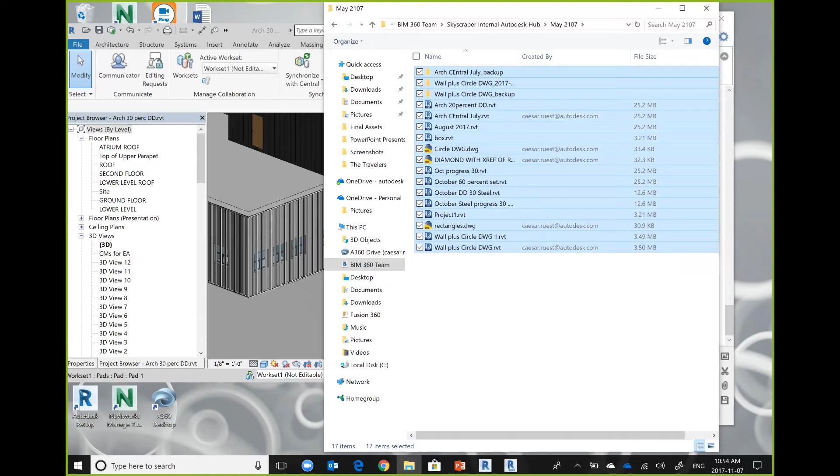I don't have an exact date, but stay tuned for it. Try to get the beta if it's available. Autodesk Drive, again, not A360 Drive.

What I would like to see Autodesk Drive do, hopefully in the future, is synchronize file folders local to the cloud. I don't think it does it yet entirely, but it'd be a nice thing to have that syncing capability, because you can almost smell it down here in the taskbar. When you right click on it, you can say work offline, which has a syncing kind of mechanism. And then it also has a pending actions capability as well if something fails to get synchronized up there.

So I hope, was that the answer to the question? I think I went off track a little bit. No, you hit it right on.

Okay. That was fantastic. So Caesar, is Autodesk Drive going to be a separate product, or do you anticipate that it will be bundled with other products? Yeah, not sure what's going to happen with that. Right now, it is a standalone beta. It installs exactly as you would see it right here.

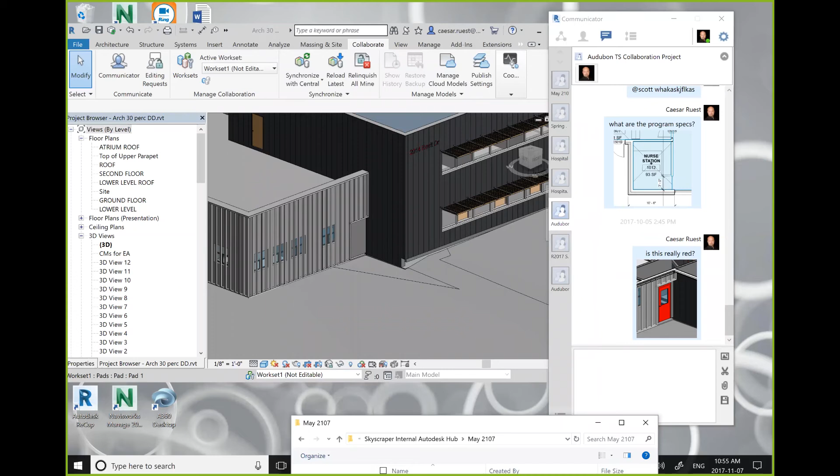I've been with Autodesk since 2000, so I'll speak from a historical context. Collaboration for Revit, this collaborate in the cloud, never used to exist in 2016. Didn't exist in 2017. It was separate. Now it's kind of bundled into 2018. The mechanics are there. You just have to pay for the service to turn it on.

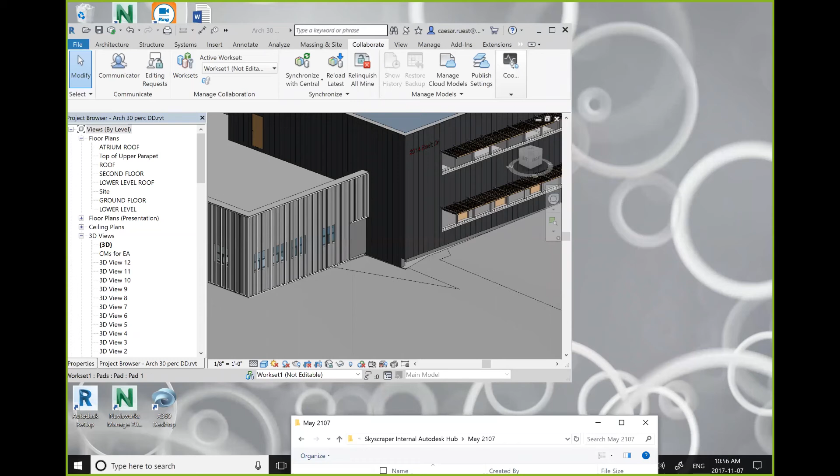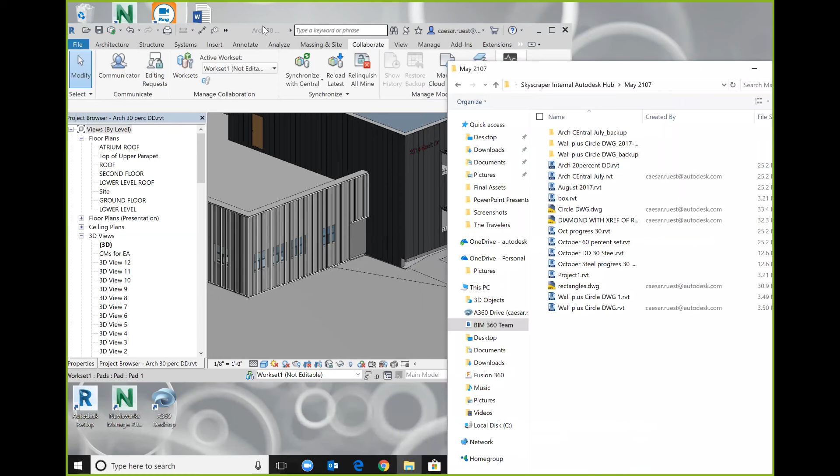So I would say at first, if it comes out sooner than later, it'll come out probably standalone, and in the future, if I had to guess, it probably would be somehow latched in, because this Autodesk Drive is the answer to this question.

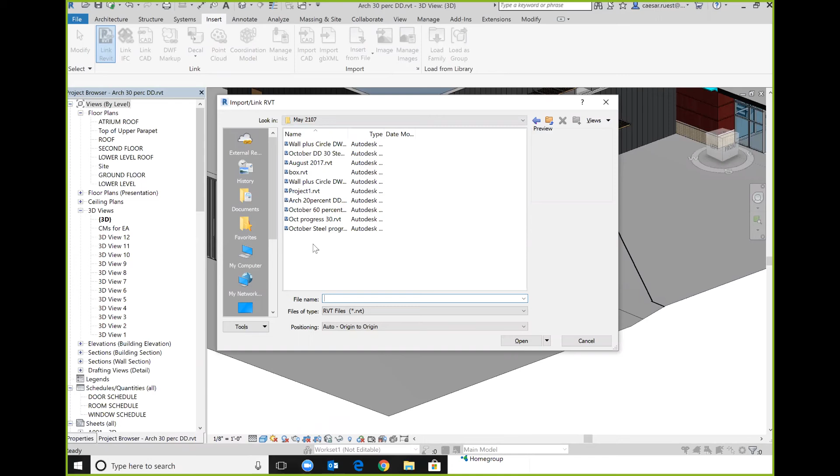If anybody's seen this kind of presentation before, Collaboration for Revit enables Revit linking. So you can see external resource right here. You can see May 2107. So we could link a Revit file because we bought Collaboration for Revit. But what some folks were saying was missing was, where's that external reference button? I'm clicking on Link CAD and it's missing.

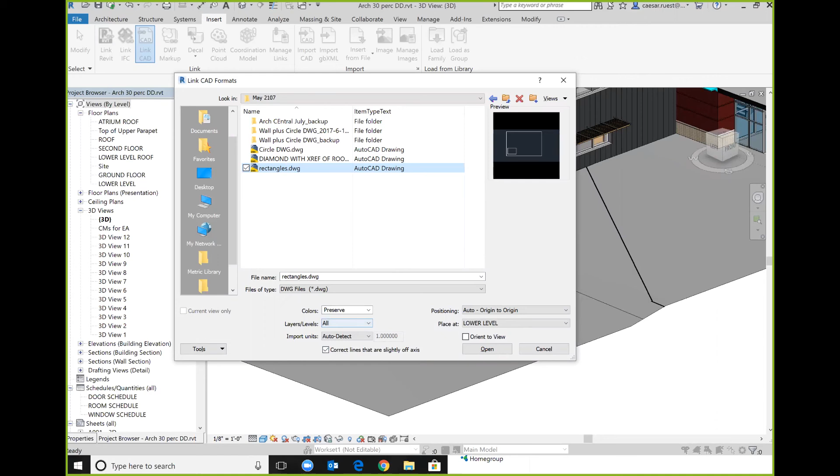But because I installed that beta of Autodesk Drive, you come down here to my computer. There it is right there. You double click this and now you can link DWGs from the cloud. And when you do this, let's see if I can push fate for a second here. That was cool. So let's go into 2107 and rectangles.dwg, and I'm in the bad location here because I'm in the 3D model.

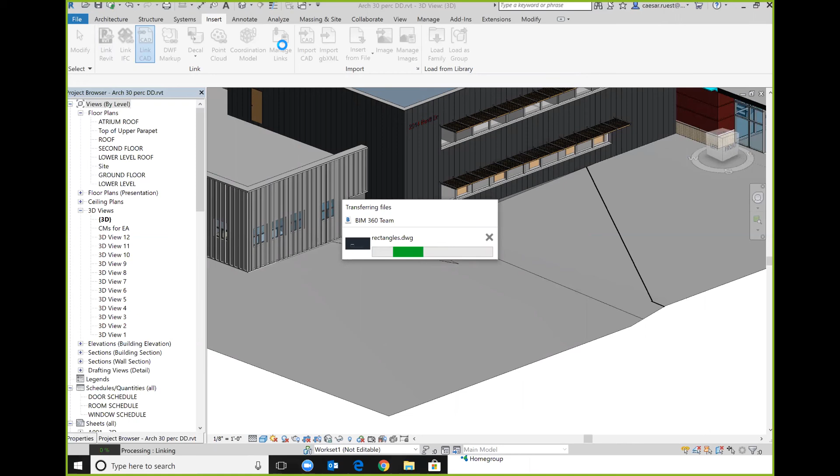But when I put this link in of a DWG, because I use my beta of Autodesk Drive, when I come back and click on Manage Links, oh, there we go, you will see that it's a virtual path and not a local user profile path. Any IT person out there listening knows exactly what I'm talking about. So we're in Manage Links. If you go to CAD format, see, this is what you want. You want a virtual path.

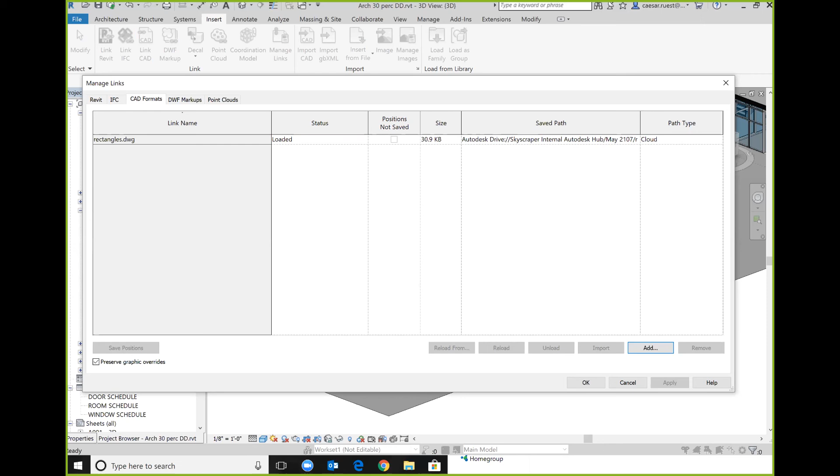This, in the different betas that we've had, has been hit and miss. The old way it used to say is C drive / users / Ruest Caesar. It was my local path, which is like, no. So now Autodesk Drive in the beta format is properly linking to a cloud path. So that means that if I send this file to Douglas and he opens it, it will respect this cloud path and still open this XREF, which is perfect. Very nice. Yep.